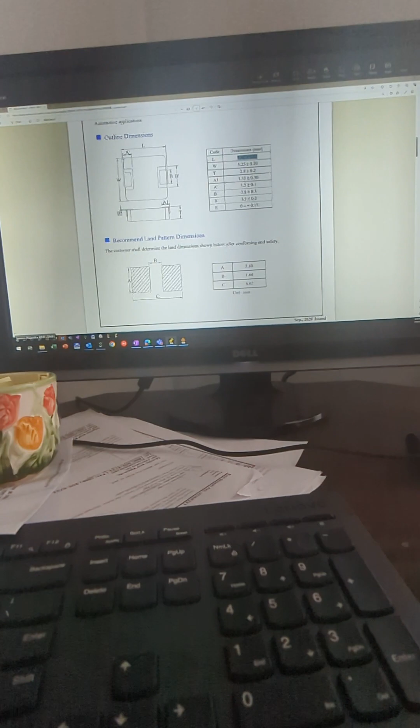So that's on, if you go on package. Oh, yeah. Oh, it's smaller right now. Well, it's in inches. 5.25 and the thing is... 5.45, I think that. Oh, okay, 4.5 and 3. And then, yeah, that makes more sense.

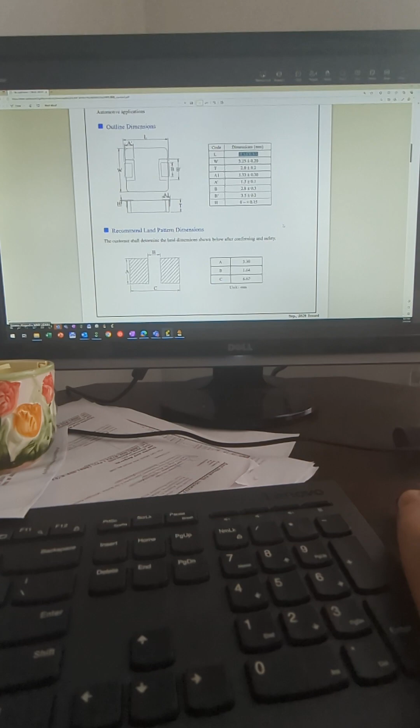Then the lead, we said the height would be that, which is not described here. It's not described in here. It's like halfway, right? The height, yeah, it's about halfway, so I'd say 1.4. It's not going to affect results too much. 1.4. The width, that should be B. Yeah, B. Yeah.

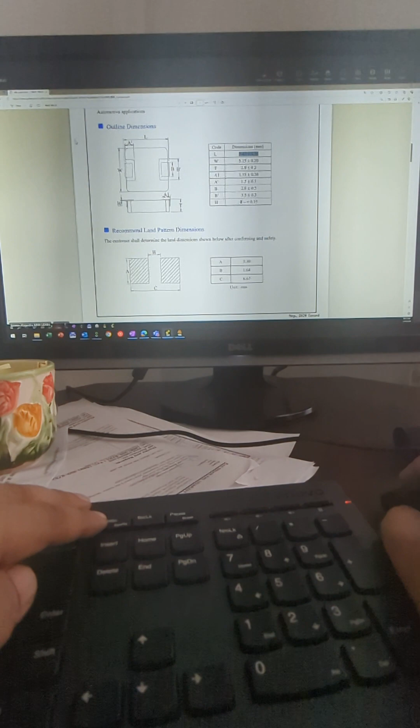0.8. The thickness, that would be H. Yeah, 0.15. That's fine. And lead foot length. Okay. It's inwards. So I guess it's A1. Yeah, 1.33.

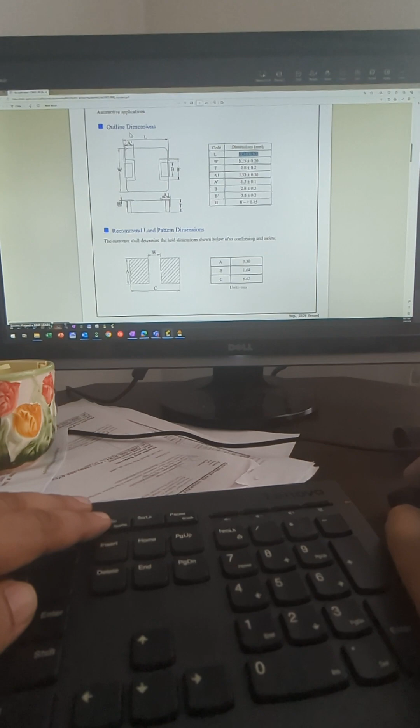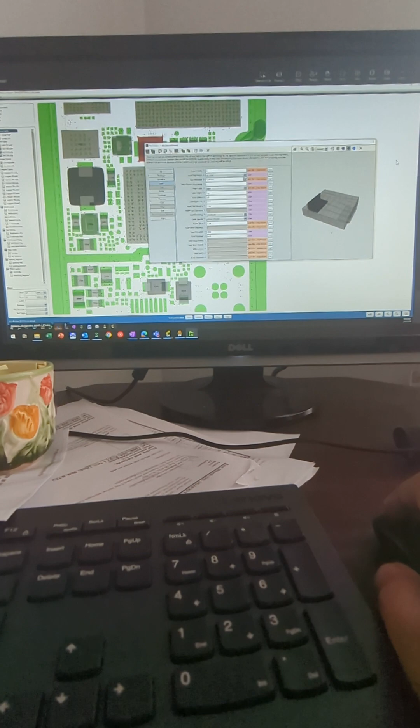How do I tell it that it should be inwards, not outwards? Should I put minus? No, it will work if you've got a lead shoulder. So if you make that really, really thin, 0.05, yeah. And then if you do the 3D model in the cube, you can just see what your things are doing. Oh! So something's wrong.

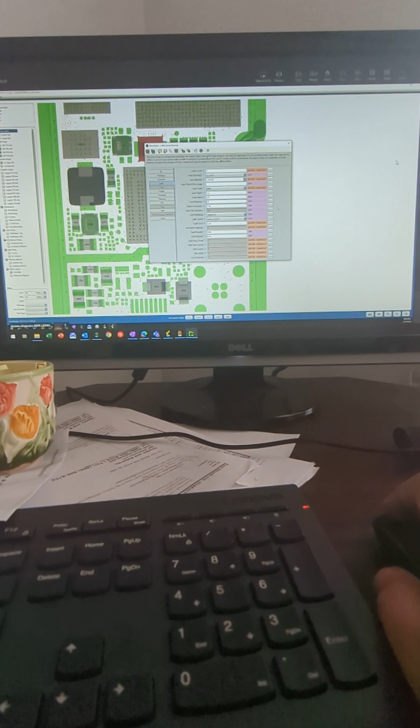Yeah. So for the package thickness, we need to put 2.8. Yeah, 2. No, that's the lead thickness. The lead thickness is right. That's what we need to put. Oh, that's 1.9, 0.15. 1.4, I think we had. Oh, 1.4? Oh, sorry, yeah, that's right. Yeah, 0.15 is right. Yeah, that's 2.8, wasn't it?

Okay. I think the height was 2.8, wasn't it? Oh, 2.8. I think in the data sheet at least. Yeah, I always go with 2 for some stupid reason. Yeah, T. 2.8, yeah. 2.8. Yeah, that should be pretty good.

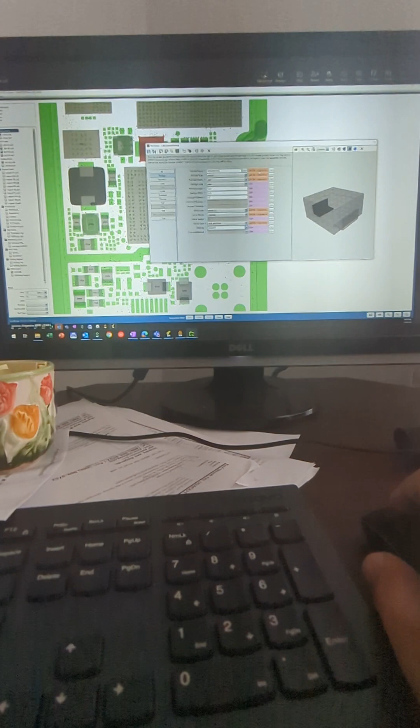The only thing we need to change now is the material. If you put that to ferrite, because all inductors are pretty much made out of ferrite. Well, in short terms at least. Oh yeah, it's an inductor. So. Yeah. Can I say that? Yeah, let's just check the die. Sorry. But at least it's the right size now.

Go package type. Okay, we can ignore that, but go on to solder. But yeah, if you change the program model to detailed. Oh, okay. It doesn't do it automatically? No. And then package. No, actually ID is somewhere else. If you go on ID, so we're package. We just need to type in the package type. It might mess it up actually.

We need to pick a C lead. C lead. Here. Yeah, maybe if I can just request control and type in something. Yeah, if I go here. Oh, you want to change the package name. Hopefully. Nah, because it's got a die here, but we don't want a die because we don't have dies, and that will mess up the exported material property. Oh, okay. So if we go bend, yeah, see how the die is grayed out.

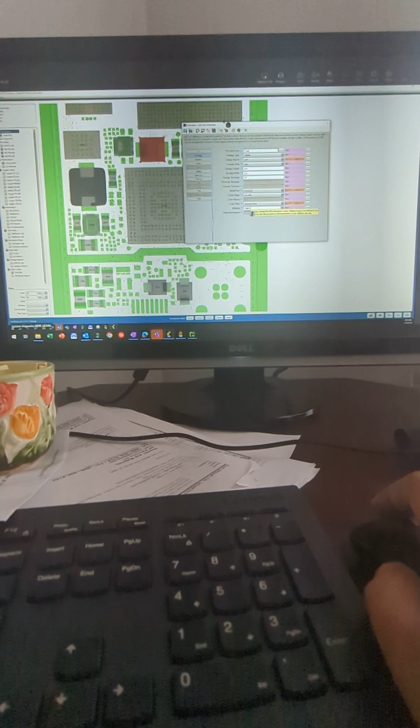Okay. So when we export, what Sherlock does is it averages a material property for a package, but what it will do here is just apply pure ferrite. If we had a die, it would average out the area of the die length, width, and thickness, and then average the volume of the rest of the package, and then combine them into one material property because it's just making one.

When do we want dies and when do we not want dies? So we don't want dies on these inductor types or capacitors, or is this a diode? I think that's a diode, yeah. But we do want it in QFNs here. Oh, okay, the QFNs are the ones that need dies. Yeah, and also the BGAs as well. Okay, understood. So for this we'll need to use an overmold QFN. Okay, we need to check the materials then.

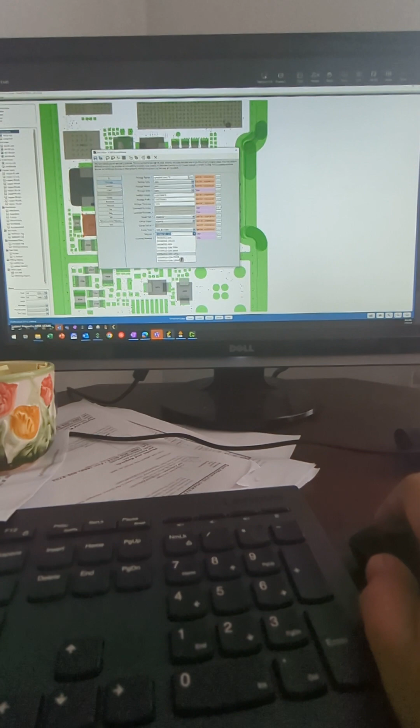Is there a general rule, like all QFNs should be overmold QFNs, or are some not overmolded? So I think what you've got here, it's all overmolded, but we've got different CTE values here that we can choose from. So if we check in OROS and find what the CTE of the mold compound is, you can enter it here. Okay, and that comes from OROS. For all of the ICs, we should check in OROS?

Okay. So Sherlock should get most of the passives, and if it doesn't get an inductor, and if it's only a couple, then we can manually edit them ourselves. But let's say you go into your part list and everything's not picked up by the part database, you really want to send it to ANSYS, because we don't want to be entering loads of packages.

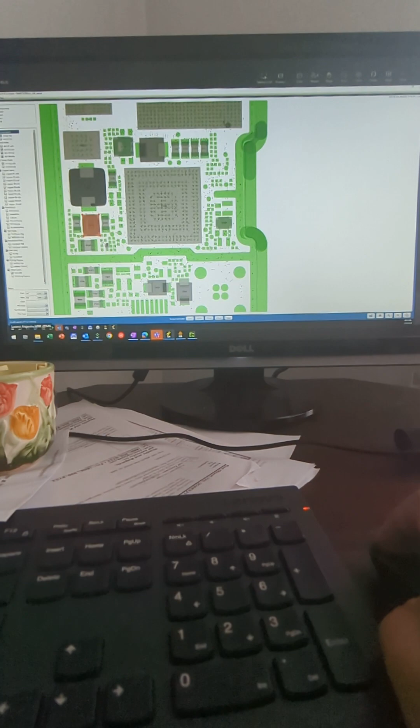Fortunately it's got most of them, so we can fix the cases where it's not. But one thing you'll still need to do is enable the lead modeling to get the orientation right. Fortunately for us, it's not too many. You'll get pretty quick at it, but for the big BGAs it's a bit more important.

To change this, it's been picked up by the part database from ANSYS, but they don't know the actual material properties because the customer doesn't publish them. We have to ask them, and then we enter the information ourselves.

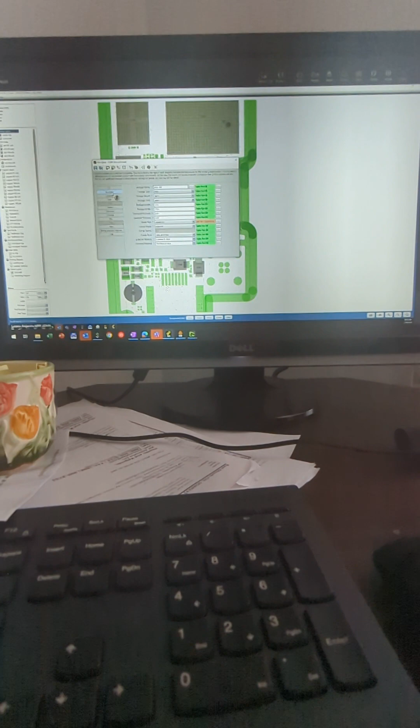Same for the die dimensions. They're not too far off, but for instance, I know this Oryx device has a 0.2 millimeter die. You can find all that information in OROS - that's one thing I need to do. And then the other thing we need to do here is enable ball modeling.

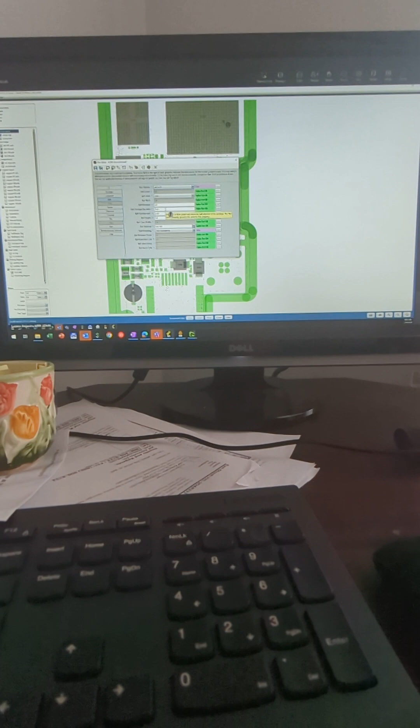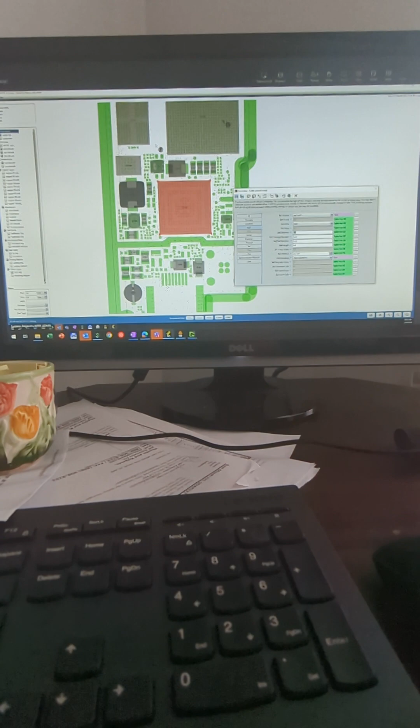And then I have a question - why do we need to do the ball modeling if we do a script to do the balls in mechanical? Yeah, so when we're doing fatigue analysis, that kind of scripting makes very detailed solder joints, but it makes the model a lot more complex. So to consider the effect of other components on the component we're modeling in detail, it's good to have - I'll show you some very basic examples.

There we go - because those little squares will get replaced by real balls, right? With different types of material - the copper and the solder. So that's for really detailed analysis, but for the first step the analysis is the strain map with the components - we don't model in that much detail. Because you can imagine, if I save this, it should look good.

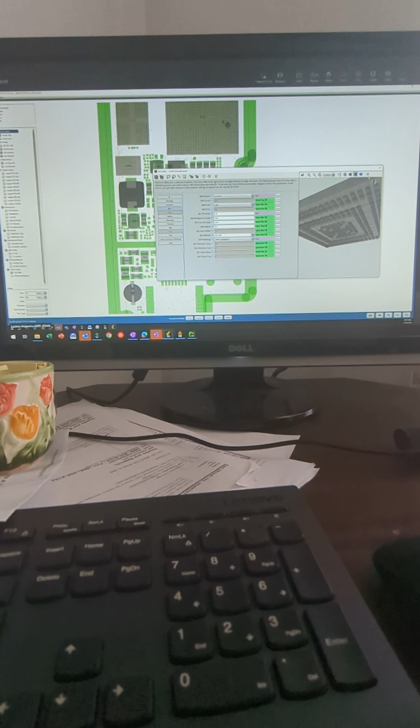Before we proceed, Carla, Dinesh, do you guys have questions until now, or are you following? I'm okay. No, I'm fine. Okay, yeah, I'm doing the same changes that you are doing.

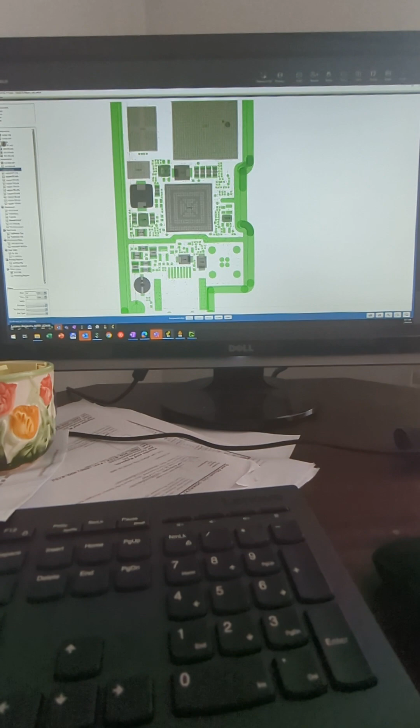Good. So for the BGAs, it's important to model these because you've got to remember, if we show all the BGAs, these BGAs will impact this BGA, they'll all combine together to impact each other. So we need our model of the component to try and consider its effect when we're predicting fatigue on, say, this one.

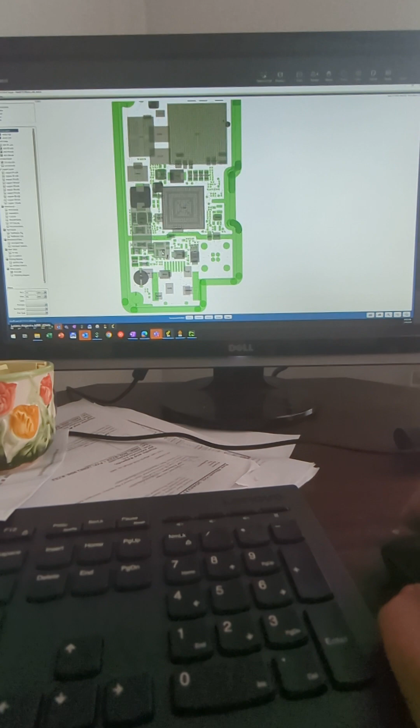In terms of that, there's still quite a bit of clearing up and checking all of us and getting the QFNs in, but we can make a model to begin with, and you can view it.

As a summary, to focus, what we need to get from ORAS, I will write this down. We need to get from ORAS the package size. We need to get the die stuff. What else is important to get from ORAS? So for a BGA, the substrate material. And then for QFNs and BGAs, the overmold material properties.

Because these are just generic at the moment. We do get quite a bit of variation. Those materials will be guessed by the system, but probably not correct. These are guessed from Sherlock, but Sherlock's only got a generic BGA material property for everything.

And this does not get updated when we update the database with what changes we did - it doesn't get updated in the database. Yeah, it does actually. How was it that you do that? But we only have to do that once, and we'll get the... it was, I think it might be...

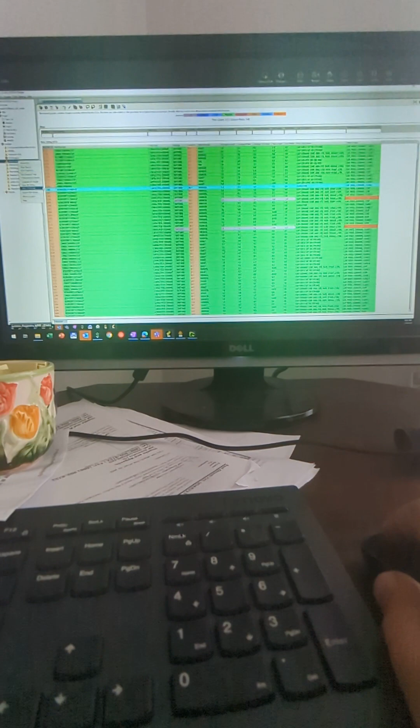So yeah, that's fine - export FEA model. And then put it somewhere that would be good. Make sure, for Dinesh and Carla, that you've got the file type ANSYS Workbench journal. It should always be a version, right? Yeah, the Workbench journal.

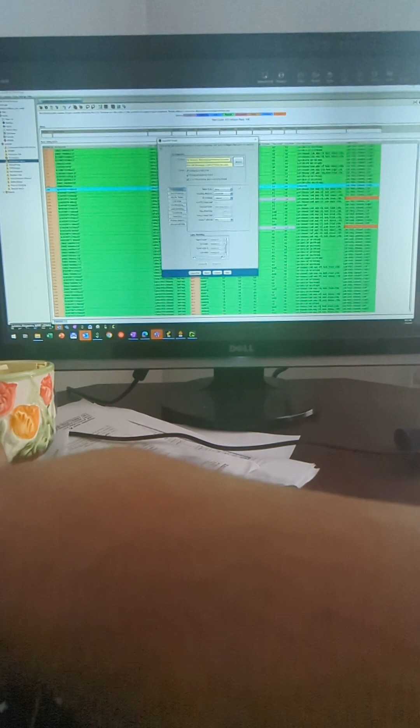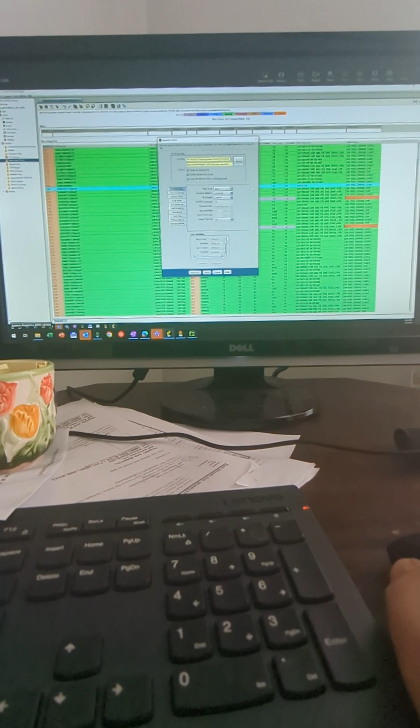And then PCB modeling, that's fine. So the options we've got here is, we're not exporting a mesh, so it doesn't actually matter about the top one, but the PCB model, you can export layered information, but we just export the PCB as one block because we materially measure the PCB not by the material layers. I don't think we did the stack up.

Yeah, no, because we're going to override the material property with the measured material property, because you measure the CTE. Yeah, because it's all... well, you can never really get it good with Sherlock, so it's always seemingly wrong.

Okay, so even the material? Yeah, so we didn't change anything at this point on the stack up. You can do it to get like a feeling of what this PCB CTE would be, but you never get anything accurate really. So, okay.

Yeah, so that's all fine for that. And then if you go just through these options, if you go to trace modeling, if we'd enabled the layers, you can actually get it to export the copper traces. Oh yeah, but we're not doing that either.

The mount points don't need to be enabled. The drill holes in there, we don't need them. So if we put that minimum size to 3, because that's what we've been doing in that, that's the model. And then that's all fine.

So if we go to lead modeling, enable this so we can see our leads that we've made. Which order should we? It doesn't actually export a mesh, so it doesn't really matter. Oh, okay, understood, we're just getting the geometry. So these three don't matter, right?

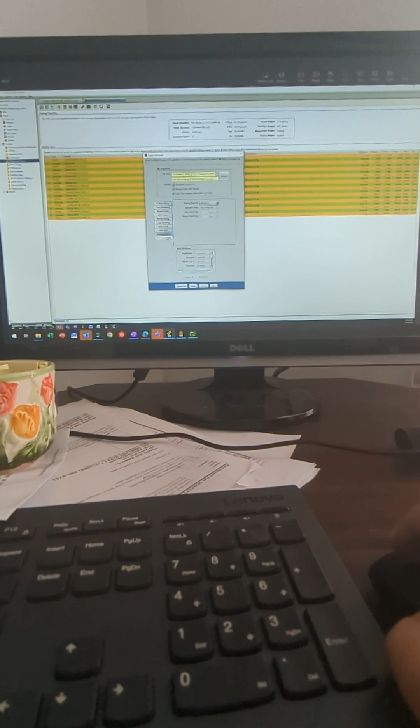Doesn't matter, yeah. Okay, we don't want wire bonds. We don't want heat sink, potting, or mechanical parts. That's all fine. So yeah, we can export now.

So it will create a new one, right? It will not import into my current one. But I'll show you how to get it into your current one. Amazing, because that was one of my biggest questions. I was like, how do I get it back?

And I expect you'll probably get some errors when you do this, because we've not printed in all the parts properly. But it will be a good kind of point to show what you might see if you've not done something right.

So the way that you work is usually creating another project, a blank project for the Sherlock thing, and then... Yes, there's a few ways, that's one way. What I typically do is I bring in the step file into my existing system model, and then run the Python script that Sherlock exports to map the material properties. Oh okay.

Takes too much time. Mine is thinking, dear. Is yours going okay, Dinesh? Yeah, I'm still at A.

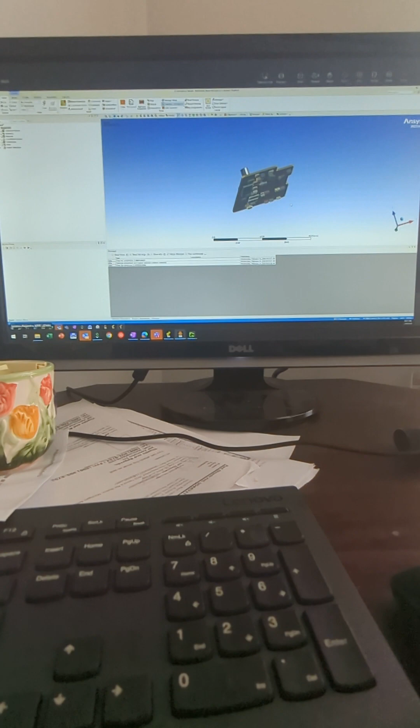Yeah, you should be able to click on that. But you can see it looks a lot better now. So you've got some overlapping components. Yeah, but I guess it's a population thing, right? Yeah, the populated an area.

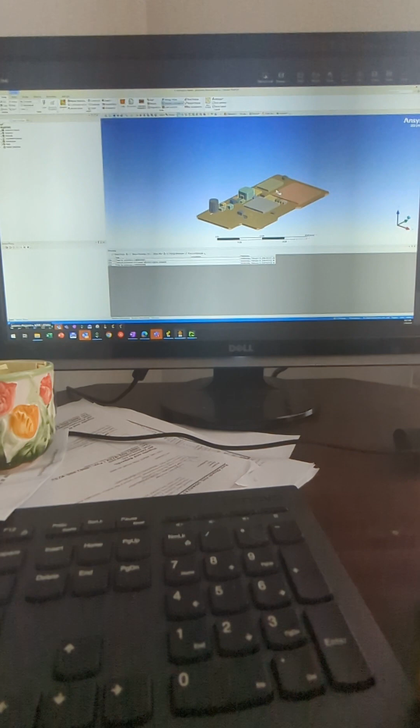In my case, Stuart, there was a message that something isn't on the material. So when I go inside the engineering data, I saw two points with negative modulus. So I just changed it, right? And that's all I have to do, right? It will work, I guess.

Yeah, so that means Sherlock does something bizarre in those situations. Okay, and it's normally when you've got like a QFN. If you go back into Sherlock, Alejandro,

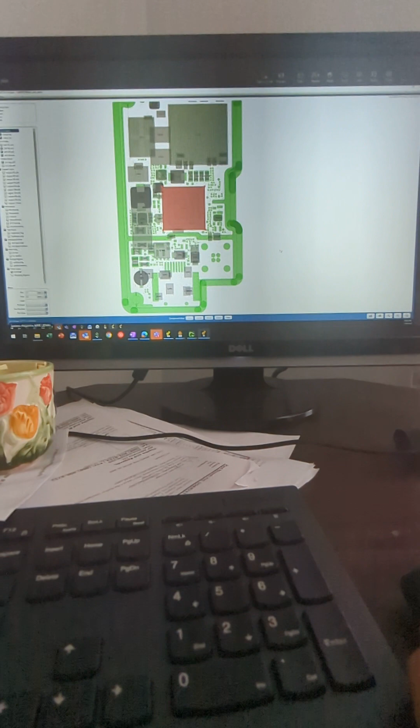if you go onto a QFN, so let's say IC507. This one? 507. 500, it was just one, this line. One? Yeah, that's it. Yeah, if you go to edit properties, you typically get negative Young's moduluses if you've got the flag dimensions or the pad dimensions wrong.

Oh. Okay, so how do I know, Stuart? I thought that I could just eliminate the minus and that will work, or no? How do I know the correct Young's modulus, or just leave it like that?

Eliminate the minus? Yeah, let me send you a message about it - I've got an email because I had this problem and I spoke to Ansys to understand what it was doing. So I'll send you an email for it. The best way is to fix the Sherlock component and export again. Okay, that's fine, I will do that.

Dinesh, for you it works okay, yes? Alejandro? Yeah, for me, okay, it works now. Yes, I have the model open. Okay, I will fix it then. You can continue, Stuart.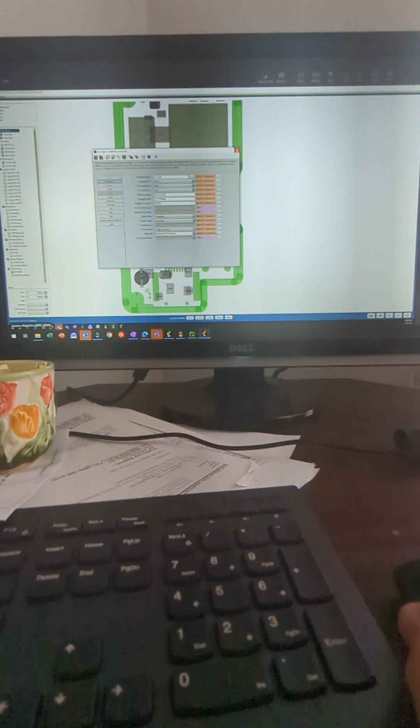Yeah, okay, if you could - I've only got a minute now, but if you go onto the workbench again. Yeah, so what Sherlock's done is it's got engineering data, which is the figure in A1 or A2.

Yeah, so we export that and import it in our project? Yeah, that's right. Okay, sorry guys, I didn't realize I have another meeting, so I have to go.